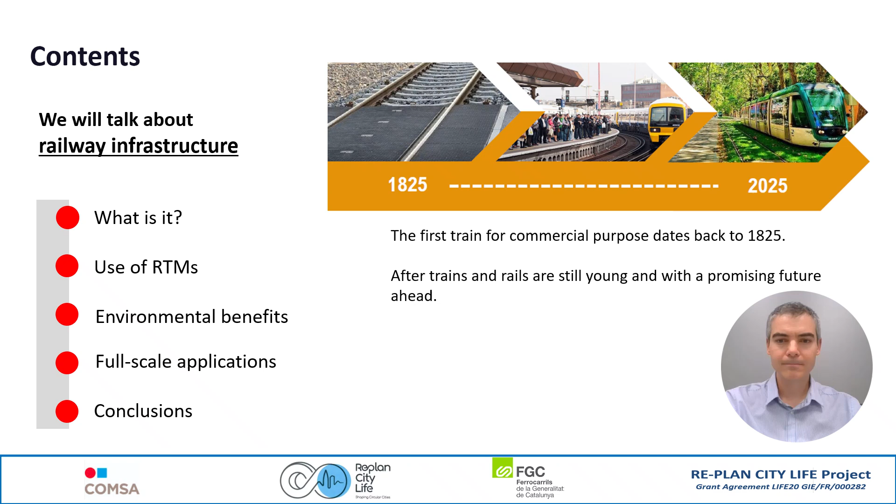Trains are one of the most popular and efficient ways to travel, especially in Europe. The European Union has built an extensive railway network called TEN-T, which connects countries safely and sustainably. Railways move millions of people every day while producing much less pollution than cars or airplanes. They offer high capacity, reliability, and clean mobility, which makes them a key part of Europe's transport future.

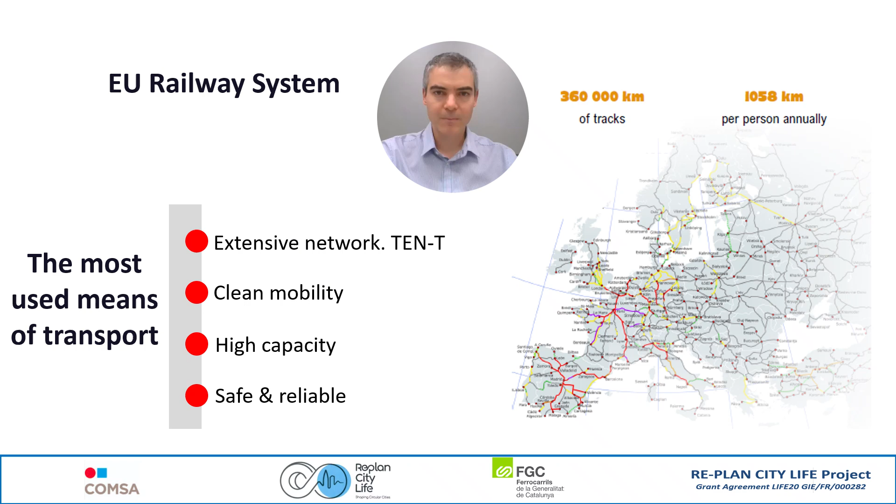When we talk about railway infrastructure, we mean the entire physical system that makes trains run smoothly and safely. This includes the rails, sleepers, ballast, and the ground beneath them. Each part has an important role: guiding the train, carrying its weight and keeping the right geometry. Together, these elements form the foundation that allows trains to move quickly, quietly, and safely.

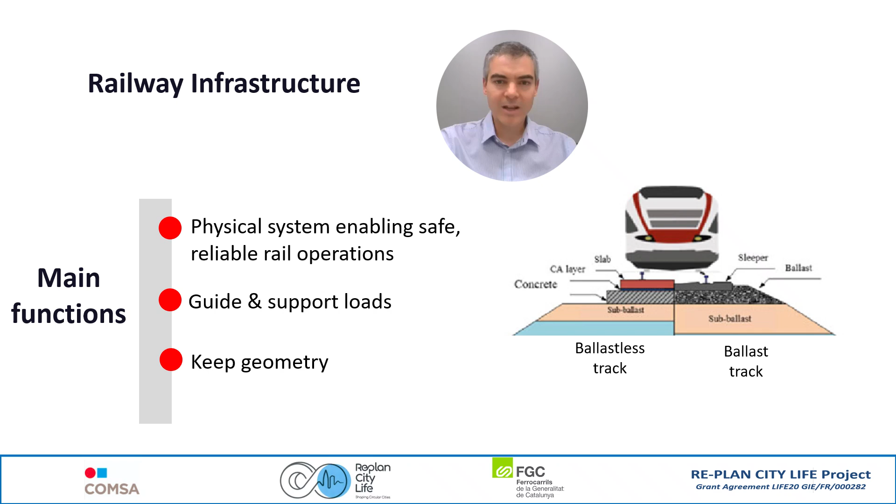Now, let's see where recycled tire materials, or RTMs, come into play. These materials can be used in many railway components to reduce noise and vibrations, extend the life of the track, lower maintenance needs, and many other applications. They also reduce the environmental impact of construction and maintenance of railway infrastructure by reusing materials that would otherwise become waste. In short, recycled tire materials help create a more sustainable, circular economy for the railway sector.

And now we will be detailing some of the applications that you can see here in this picture and explaining which are the benefits of the recycled tire materials in each case.

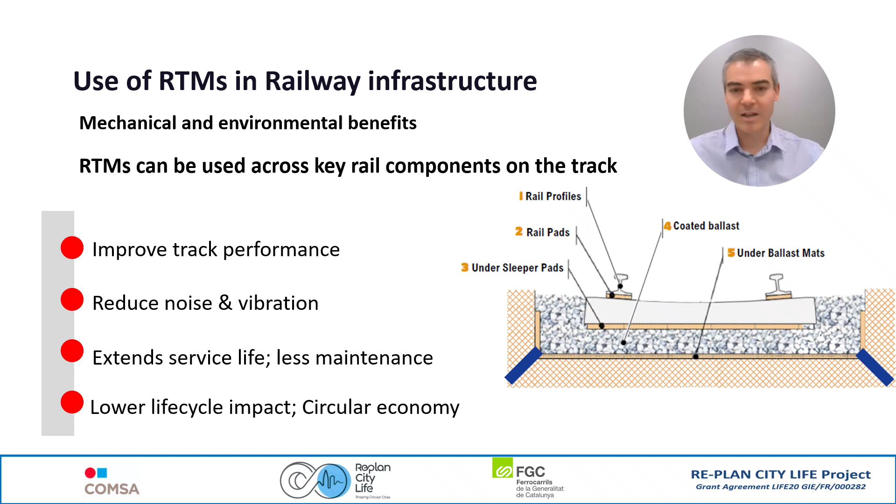The first item is a rail profile. A rail profile is like a soft rubber jacket around the rail. It helps reduce the noise and shaking that trains produce when passing by. This makes the surroundings quieter and more comfortable for people living nearby. It also protects the rail from cracking and wear, meaning fewer replacements and less waste is generated. It's a simple but effective way to improve comfort and sustainability.

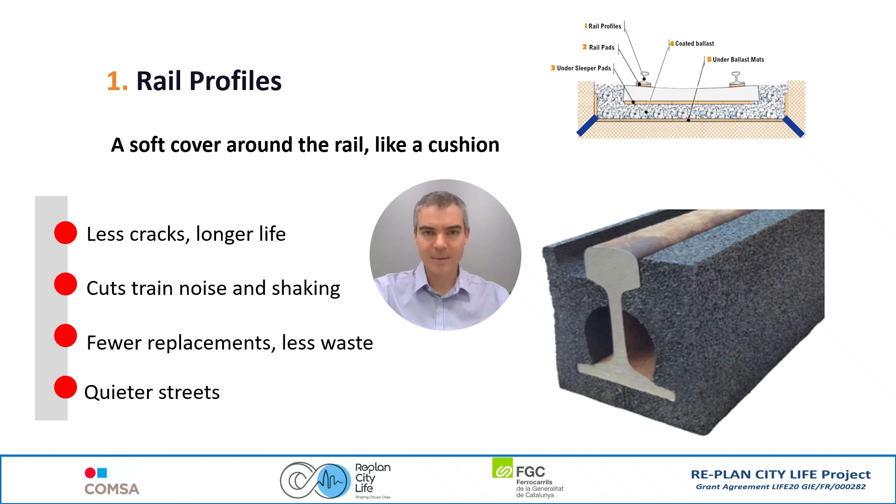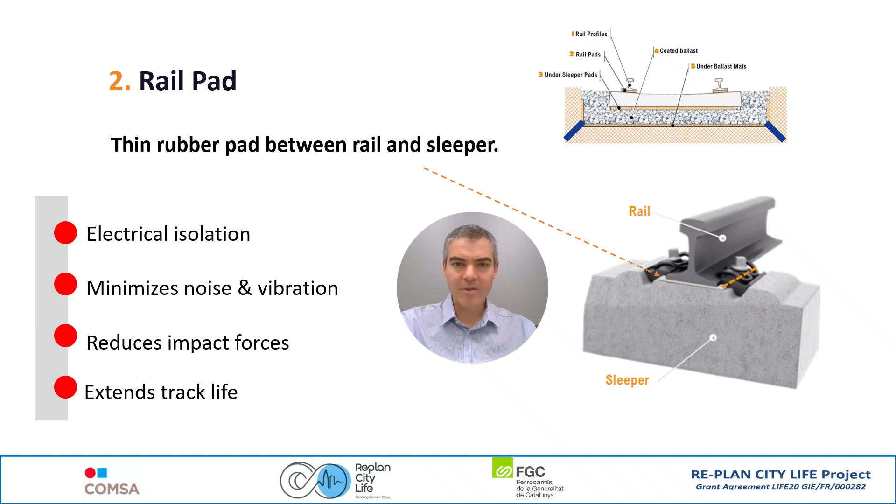The second item is a rail pad. A rail pad is a small rubber layer placed between the rail and the sleeper. Even though it's thin, it plays a huge role. It absorbs impact and vibration each time a train passes, reducing stress on the track. It also provides electrical isolation, which is important in electrified railways. So this small element helps tracks last longer and operate more quietly.

The third item is under-sleeper pads. Under-sleeper pads are like cushions attached beneath each sleeper. They reduce cracking, limit vibrations, and make the track more stable. With these pads, the track needs less maintenance and lasts longer. It's a great example of how recycled rubber can make everyday infrastructure both smarter and more durable.

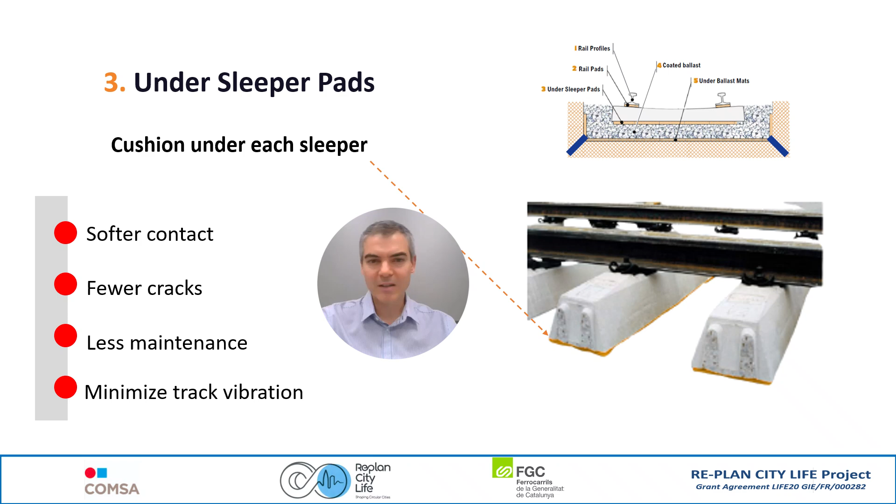The fourth item is coated ballast. Coated ballast means the stones under the tracks are covered with a thin elastic layer made from recycled rubber powder. This coating keeps the stones cleaner, reduces dust, and makes them more resistant to wear.

It also cuts vibration by up to 6 to 10 decibels, which is a big improvement for comfort and vibration control. And because it lasts longer, we need to extract fewer new materials from quarries, a real win for the environment.

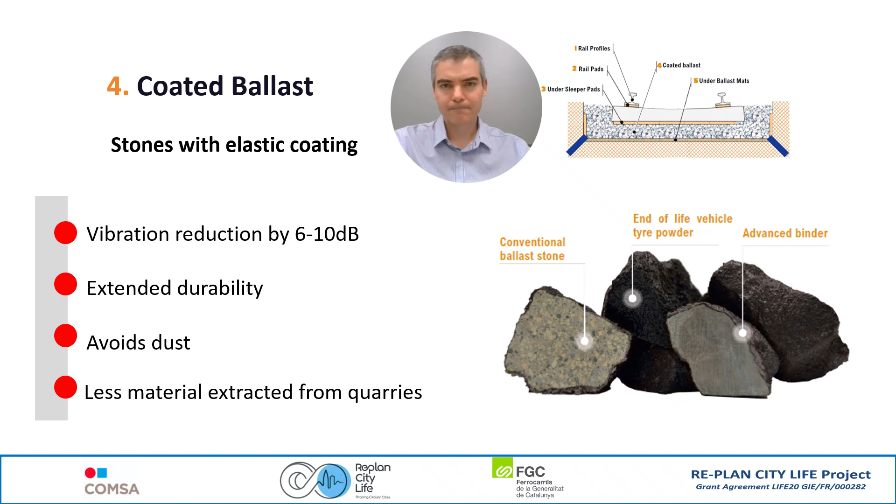The fifth item is under ballast mats. Under ballast mats are large rubber sheets placed below the ballast layer. They help distribute the weight of trains evenly, reduce vibrations, and protect the foundations from damage. They are especially useful in cities where people live close to the tracks. With these mats, railways become quieter, more stable, and easier to maintain over time.

In the case we don't have ballast tracks but concrete slab tracks, then we can use pad bearings, which is another type of rubber element placed under the concrete slab track with the same functionalities as the under ballast mats shown here.

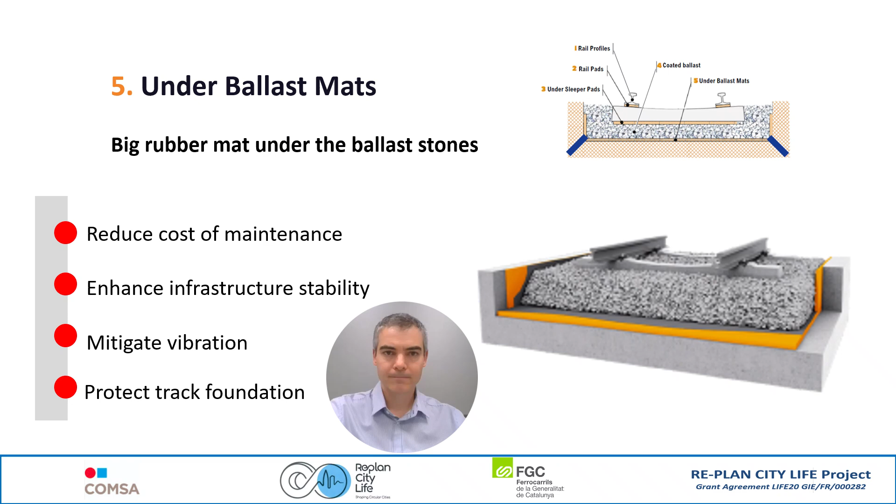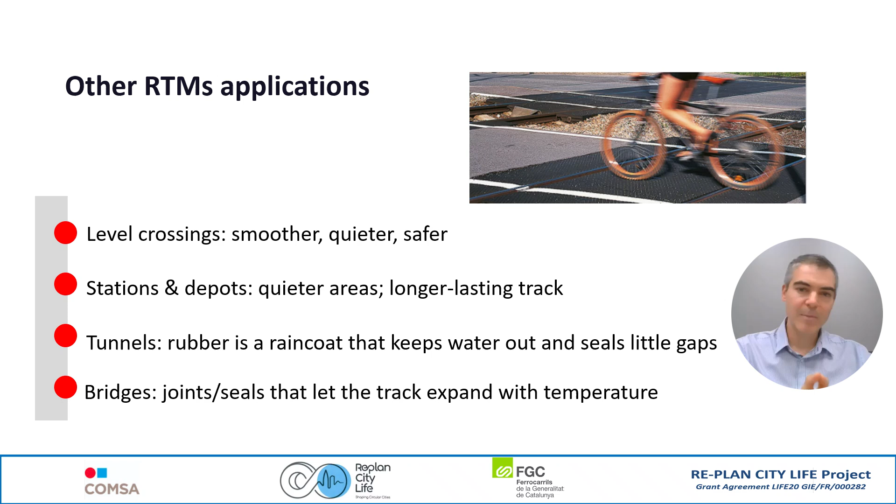Finally, recycled tire materials can also improve other railway areas. For instance, in stations and depots, they make tracks quieter and longer lasting. In tunnels, rubber acts like a waterproof jacket that seals small gaps and keeps out water. In bridges, rubber joints allow safe expansion and contraction with temperature. And at level crossings, they make the surface smoother, quieter, and safer for cars and pedestrians. And these are only some of the examples where recycled tire materials can be used in railway infrastructure.

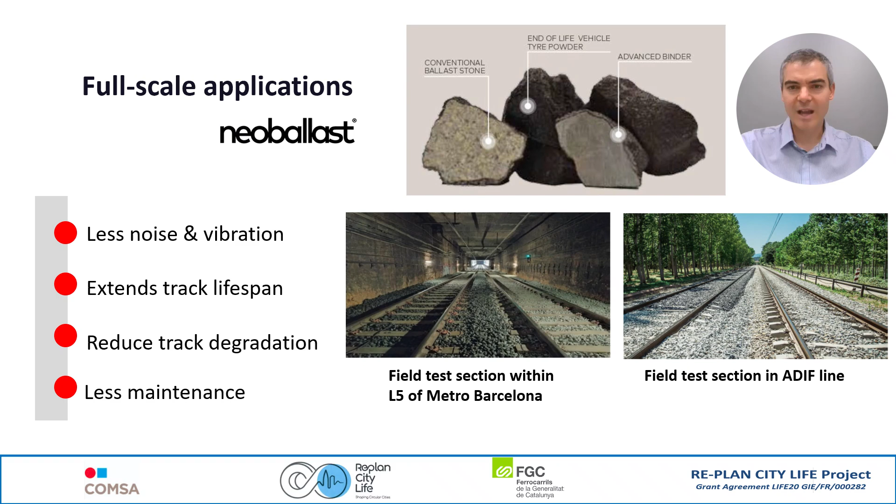Now, let's look at a real example for coated ballast, neo-ballast. This technology has been tested in Barcelona Metro Line 5 and in an Adif railway line with mixed traffic, meaning passenger and freight trains. By using recycled rubber powder in the ballast coating, the track lasts longer, needs less maintenance, and produces less noise and vibrations. It's a clear demonstration that sustainable materials can perform just as well or even better than traditional ones.

Another great project is EcoTrack, a rail profile used to renew the slab track at the Port of Barcelona. These rail profiles were made from recycled and recyclable materials, and they were easy to install or replace. They help lower CO2 emissions, reduce vibrations, and extend the service life of the track. This is another great example of how innovation and sustainability can work together in real-world infrastructure.

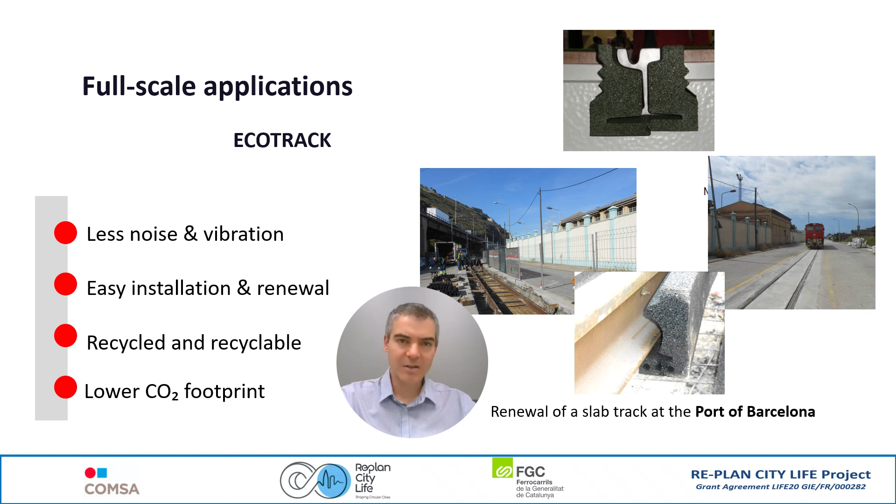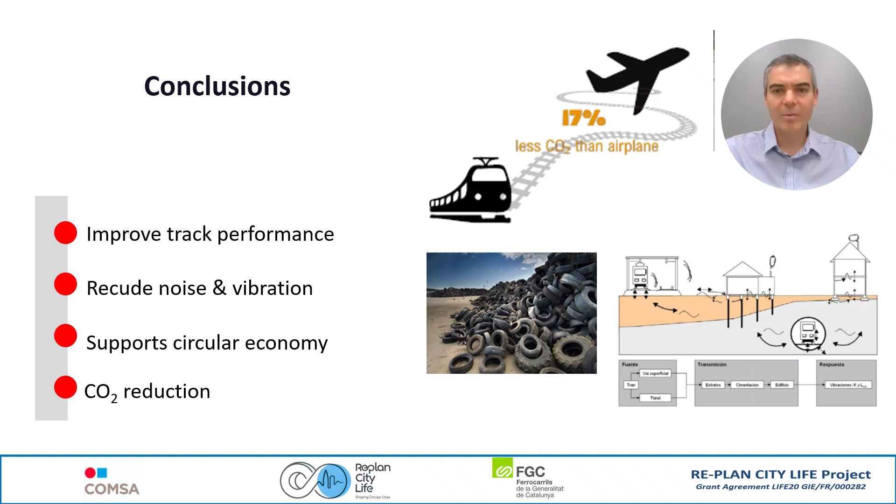To sum up, recycled tire materials offer a new, smarter way to build and maintain our railway infrastructure. They help reduce noise and vibrations, cut CO2 emissions, and support the circular economy by giving waste a second life. At the same time, they improve track performance and reduce costs. So, these solutions show that greener technologies are not only possible, they are already happening today.